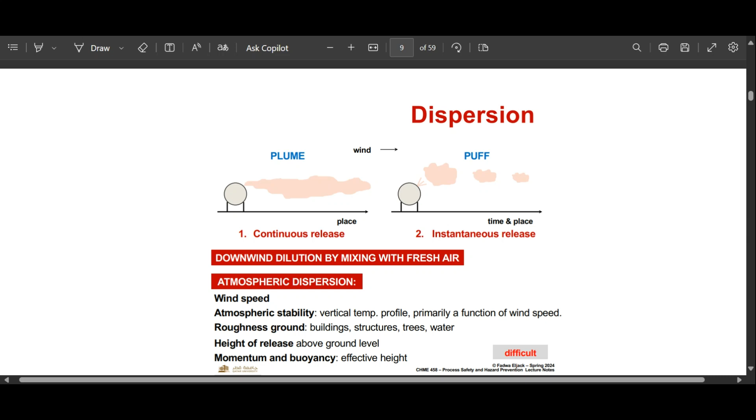Heavy gases generally want to go down. So those types of forces with momentum, all of this will impact how my material gets dispersed. It's not an easy task to model a system that considers all of these. Please note that the equations we have are basically an approximation, they will never be an actual assessment.

Nowadays, with technology, we have the beauty of having sensors and online monitoring systems, and you can use drones. So in case of a release, you can release a drone to automatically track and collect data related to the concentrations of a release.

But we don't wait for the accident to actually get the concentration, right? We want to predict what will happen on scenarios we're considering of what can go wrong, to prepare for it, to make sure we have the right emergency response team in place, the right evacuation drills. We know if that material is going to cause this much impact, then maybe more safeguards and protection might be needed.

Any questions so far, guys?

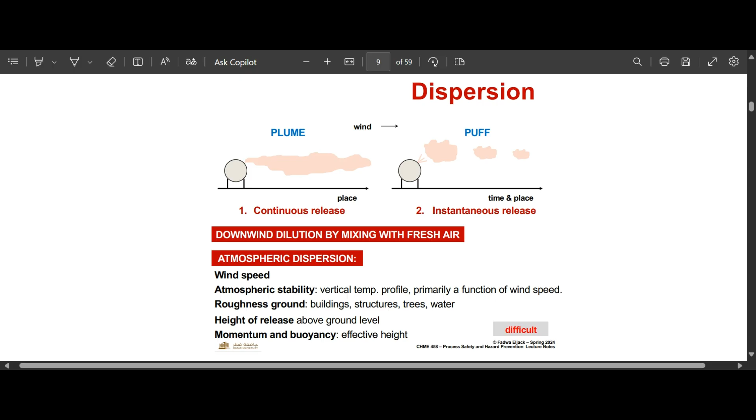Now, the wind speed, how does it impact? As the wind speed increases, the plume becomes longer and narrower during a continuous release. Also, as wind speed increases, the concentration, or the maximum concentration, of the toxic material gets diluted.

I want to again emphasize that the highest concentration you will experience will always be at the point of release, where the release is. But what we're interested in using dispersion modeling is the highest concentration downwind near the ground, where people might be. This is what the models help us predict. That concentration will always be less than the original one, but the highest concentration has to be estimated at some distance downwind from where the release occurs.

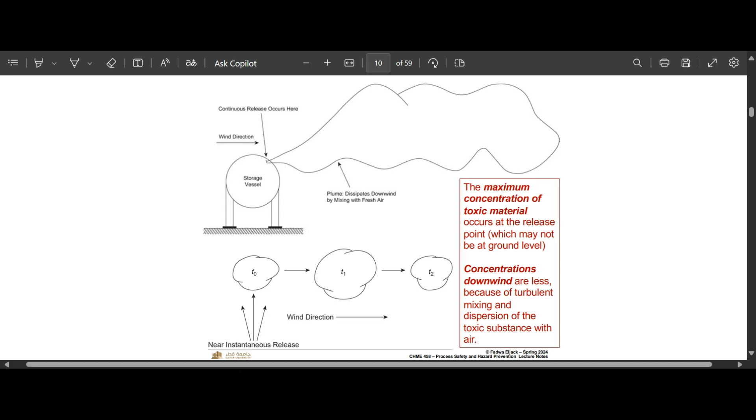Now we said atmospheric stability is also another parameter, right? Is this related to this?

Your phone? Can you put it down, please?

All right. Atmospheric stability has a big impact. We just said that the lighter gases want to go up, and the heavier gases want to stay on the ground. Now, what parameters impact the density of gases? Molecular weight. Okay, if I have the same gas, what other parameters impact its density? Temperature, right? And this is where the atmosphere comes into play.

Our temperatures during the day are completely different than our temperatures during the nighttime. During the daytime, we notice that the closer we get to the ground, the higher the temperatures are on the ground. The reason is that on a very clear day, especially in Qatar, the sun radiation hits the ground and causes a lot of insolation. This is where a lot of heat is absorbed on the ground as a result of radiation.

Because of that, the temperature difference between the ground and the atmosphere becomes much larger during the daytime. At nighttime, what happens? The temperatures near the ground are a lot cooler than the temperatures in the atmosphere. So the opposite happens. During the day, temperatures on the ground are much higher than if you go up. At nighttime, the temperatures near the ground are a bit cooler than the air at higher levels.

Because of this, if I have a release occurring during the daytime, where are the lighter gases going to be? How are they going to sit? The lighter gases will be near the ground because the higher temperature is at the ground, where the heavier gases are on top. Is that normal? No, it's the opposite. So what do gases want to do? The lighter gases are going to want to go up. This change in buoyancy force is going to cause mechanical turbulence in the atmosphere, making the atmosphere unstable.

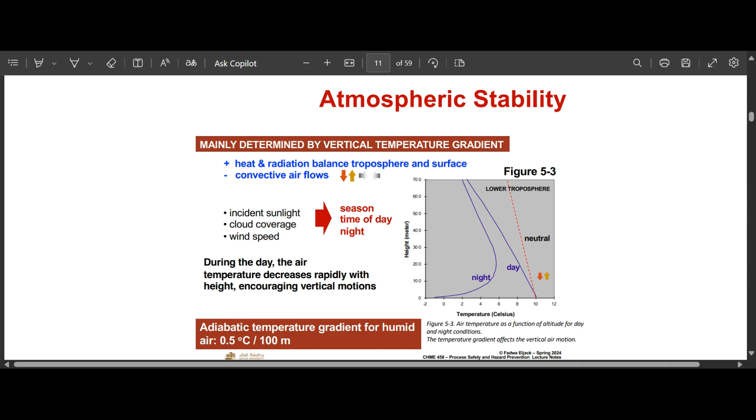In the unstable category, the air with lower density is near the ground and the air with heavier density is above the ground. This usually happens when there's high thermal radiation and insolation changes, causing a highly turbulent and unstable atmosphere. Here, buoyancy forces are helping to cause mechanical turbulence.

The second category, neutrally stable, is when the air above the ground is warm, but the wind speed is high enough to help cool off that air. This reduces the effect of thermal insolation, giving you neutrally stable conditions, meaning it's neither highly mixing nor highly stable.

The stable category is where heavy gases are on the ground, light gases on top, with limited impact of buoyancy forces, because temperatures on the ground are low enough to make that happen. During these conditions, we have a stable atmosphere, and the highest concentration of gases will be near the ground.

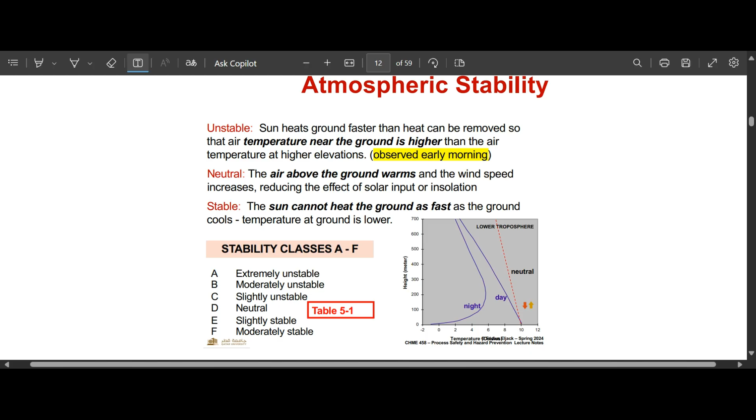When we divide them into 6 classes, the first 3, A, B, and C, are the unstable conditions. A is extremely unstable, B is moderately unstable, and C is slightly unstable. D is neutral stability, and E and F are the stable classes.

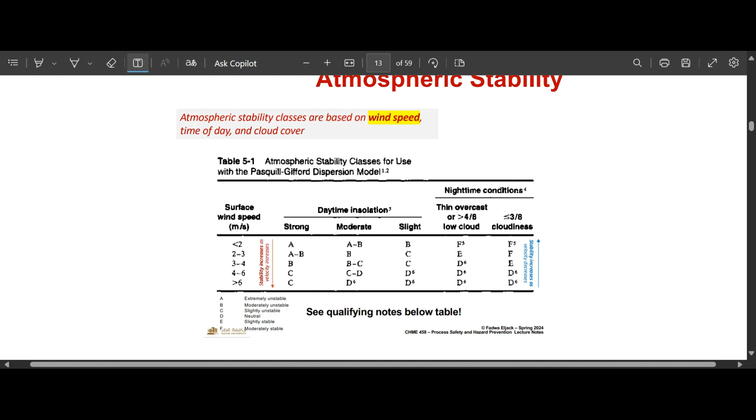We have guidelines to help determine what class of stability we have, because we need it to do our modeling. These are based on wind speed, time of day, and cloud coverage. By the way, these are not etched in stone—they're more fuzzy guidelines in terms of the stability class.

These 3 columns are all talking about daytime, and the last 2 are talking about nighttime stability. A is the highest unstable, and F is the highest stability. Notice what classes we have at nighttime? D and F, mostly stable.

Why? Because the ground temperature is lower, the heavier gases are on the bottom, and we don't have much turbulence. So it's mostly stable at nighttime. During the daytime, we have the more unstable classes, A through maybe up to D.

It depends on the wind speed, and it also depends on whether there's strong insolation—where you feel the radiative heat on the ground—or moderate, where you might have partial coverage, or slight insolation. This is when you have a storm and don't feel the impact of this radiation.

Now let's see how daytime is impacted by wind speed. If you have very low wind speed and no clouds in the atmosphere—a perfectly clear day—these are the perfect conditions to have the highest instability atmospheric conditions.

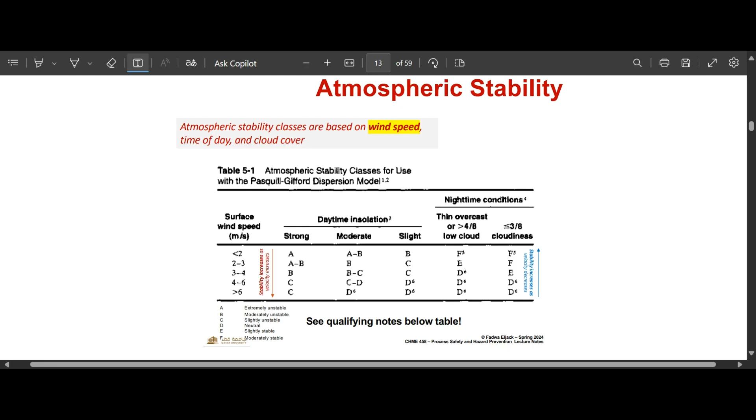If it's low wind speed, everybody's happy, things are cool, they're where they're supposed to be. But as soon as wind starts to come in, it's going to start moving the heavier gases a little bit to the top and the lighter gases to the bottom, starting to cause a little bit of motion. This motion is going to result in a little bit more instability, causing it to be more unstable, going from class F to a class D, which is neutrally stable.

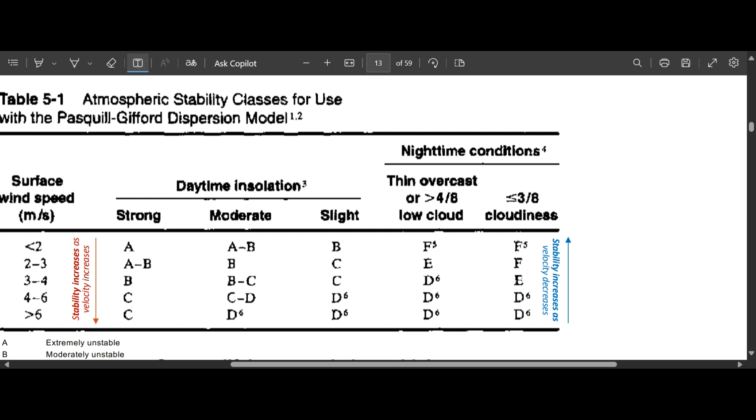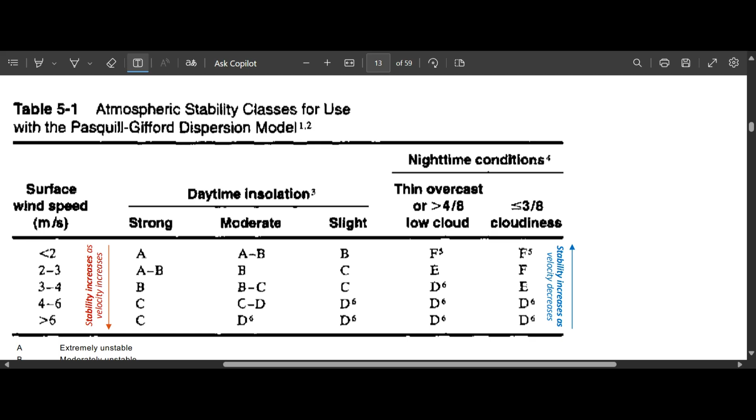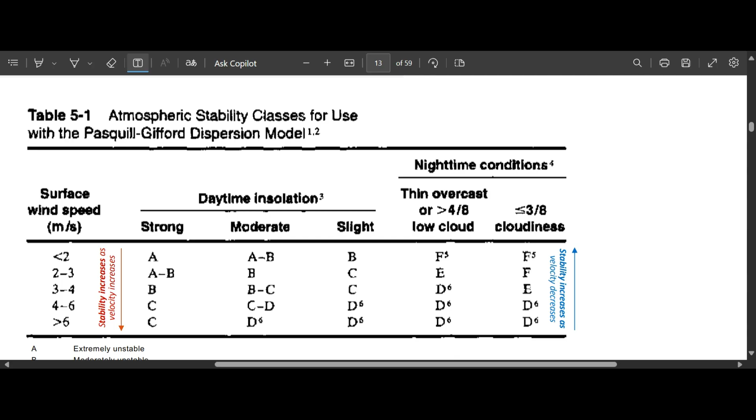Be able to understand these relationships because you have to describe the system that you're trying to model later on. Also, which of the scenarios are considered the ones we can manage to contain the leak? Let's rephrase it a little bit: what condition helps to reduce the impact of the accident on the people and the environment?

The ones that have the highest instability, category A, B, will be the ones to reduce the impact on the concentration downwind. And that depends on if it's daytime or nighttime. Usually higher speeds are better at nighttime, lower speeds are best during the daytime so that we can have a little bit of turbulence. At some point in time, the impact of wind takes over the impact of the mechanical buoyancy forces, depending on the wind speed.

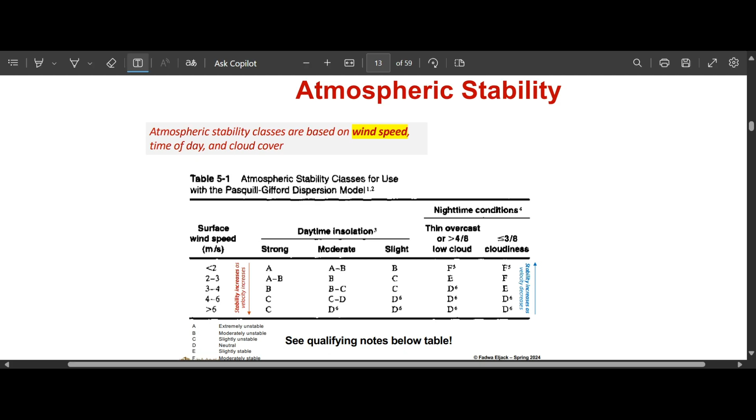So, atmospheric dispersion is a function of wind speed? Absolutely. Atmospheric stability, absolutely, and buoyancy, roughness, the height of the release, absolutely, and momentum and buoyancy. We saw that, right? We'll take a look at a bit more at the roughness and the height of release impact on how gases get carried away.

If I have an unstable atmospheric condition, does the effect of buoyancy enhance the mechanical turbulence? Yes or no? True? Why? Because the heavy and light clouds will be mixed. Yeah, but what causes it, during an unstable atmospheric condition? Increase of the temperature. Exactly.

The bigger temperature gradient between the atmosphere and the ground, because of that temperature difference, this is where you start feeling the buoyancy forces taking over, right?

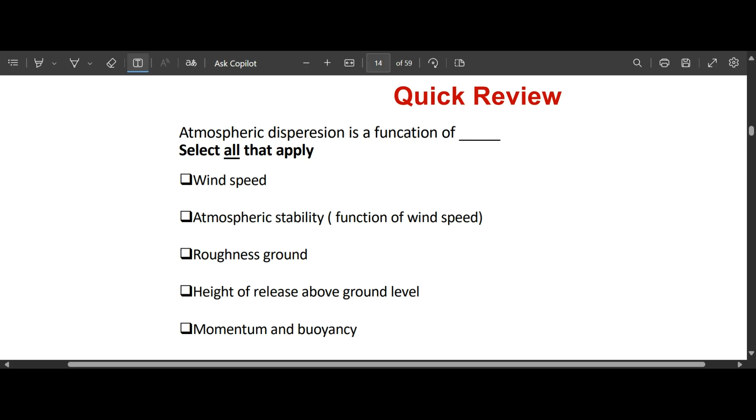So this is a fact, and the further downwind the plume gets carried, the longer it is, the larger the area that gets impacted by the release. But keep in mind that regardless of the wind speed, the total amount of material being released will be exactly the same. How it gets dispersed depends on the height of release and the wind speed.

What is the total amount of material being released? I can estimate it using source models, right? Our source models help us to determine either the amount or the rate of the material released.

Now, when we start to look at these models, the models depend on the type of gas and the buoyancy of that gas. Buoyancy depends on the molecular weight, and it depends on the density of the gas as it compares to the density of the air, because that determines where the gas is going to be released. So if I have a gas that's heavier than air, anything with a molecular weight more than 28 point something or 29, initially, once it gets released, what's going to happen? Initially, it will hit the ground, and then it will bounce, and it will start to mix with the air to the point where it becomes neutrally buoyant.

It's mixed with the air, it's suspended in there. If I have a gas that's light, right after the release, it's not going to hit the ground. It's going to be quickly buoyant into the atmosphere and will reach neutrality much, much more quickly. What type of gas I have and the density of that gas is going to impact the way in which it's going to get dispersed. This is the point here.

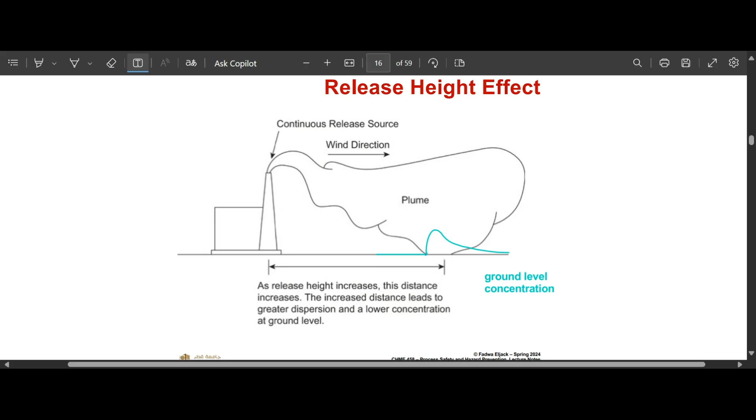Both can be modeled. Now, having those two types of models, we also need to clarify these models are not perfect, and real systems are not going to be easily modeled either as plume or as puff. They might be somewhere in between, but it's an approximation that we use. So how well you define your system and which model you select will help you be closer to what's happening in the real world.

Typically, the concentrations we're measuring for these gases is going to be in parts per million, right?

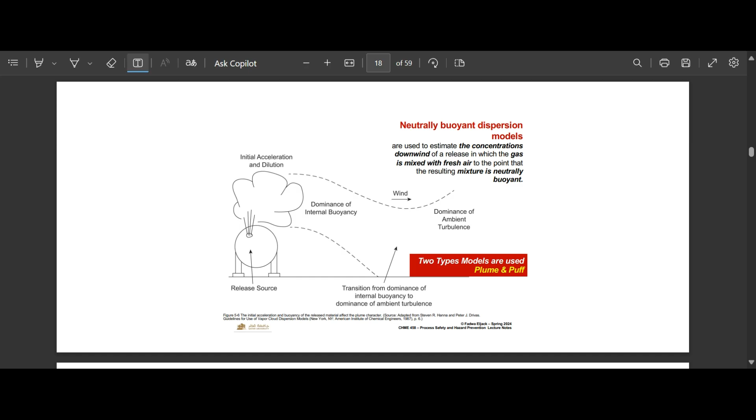Another factor that affects the way gases get dispersed has to do with the surface roughness. Surface roughness means that if your facility is near an urban city, the models are going to struggle in predicting because we don't have many models that can do that. But models also consider if you have vegetation - for example, Mesaieed is desert, so we can consider that similar kind of vegetation in our models, and our models are able to predict a little bit better in those types of environments.

Notice that sometimes vegetation might be a little bit hilly, so you have terrains moving up and down, maybe similar to Mesaieed, where we have sand dunes that might impact the direction and the way in which materials get released. So these models really have limited space to account for surface roughness, although it asks: is it going to be a rough surface? Is it near an urban release, or is it going to be a rural release, meaning somewhere out like in Mesaieed or Ras Laffan?

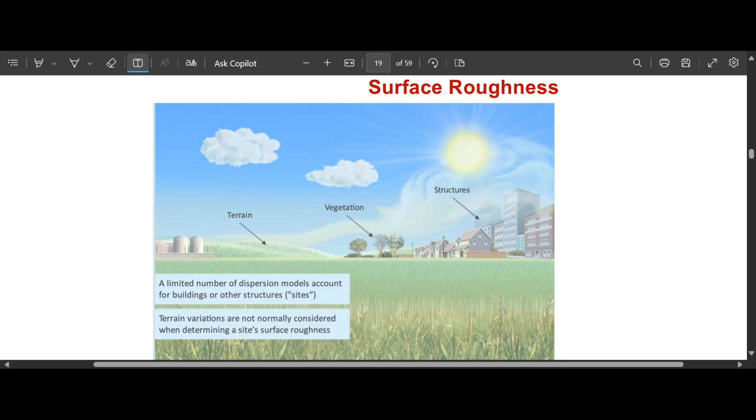So quickly, give me the 4 or 5 parameters that we said impact dispersion.

Buoyancy. Atmospheric stability. Wind speed. The height of release, very important. What else? Surface roughness.

Excuse my writing. It seems the older I'm getting, the worse my handwriting is becoming. I'm starting to scribble, and you don't have the interest to finish words for some reason in writing nowadays.

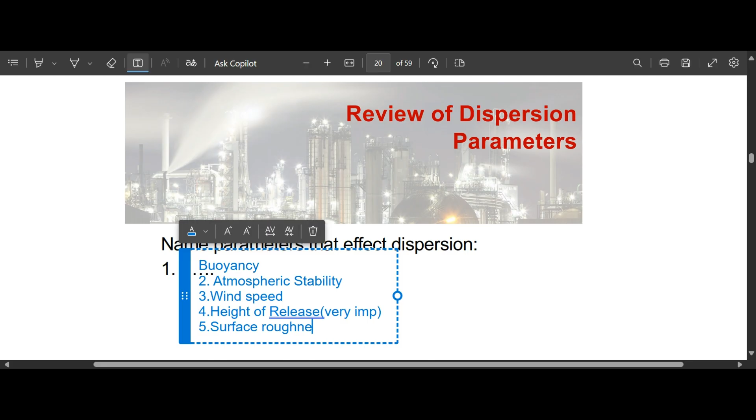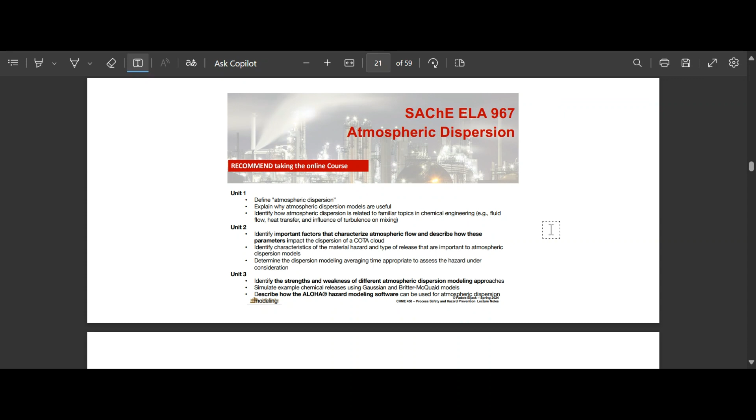Now, the models we're looking at, when you're trying to model dispersion, you have 2 approaches. One of them, you do full mathematical modeling of the system, where you're considering the eddy diffusivities, looking at the mass transfer coefficient, which is a function of many parameters, and you have a very nice theoretical model to help us predict the concentration.

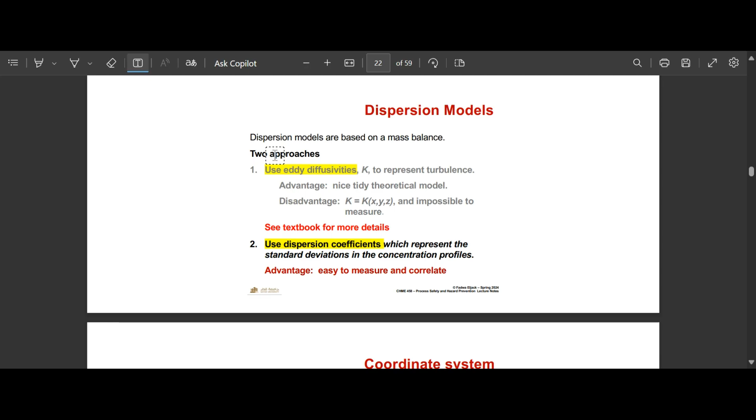Now, the issue with this is finding the mass transfer coefficient that represents the system is not really possible easily, and it's not easily measured experimentally. The other approach, which is what we use in the buoyancy models that we have, is we use dispersion coefficients, which can be experimentally measured.

This helps us determine the expected standard deviation of my concentration profile. So you'll find the dispersion models we're looking at are going to include dispersion coefficients that are a function of the space where we are in the X, Y, and Z space.

So because of that, let's take a look at our coordinate system. We have an XYZ coordinate system. The origin is always at the ground below where the release occurs. So even if the release occurs anywhere after the stack, in the middle of the tank, whatever, the origin is always at point 0 below. Z is my height, so Z would be 0, X is the direction of the wind, and Y coordinate is in the crosswind direction. This is how we look at our coordinate system. X is always in the direction of where the wind is blowing.

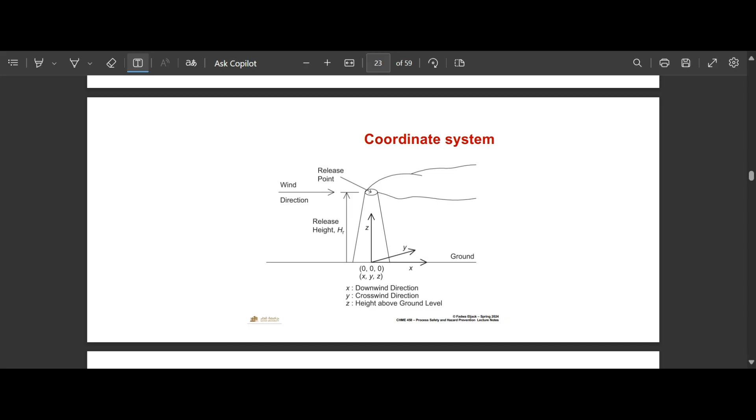But the full equation depends on the mass release rate. It depends on the dispersion coefficient, which takes into consideration the atmospheric stability and the wind speed. So you will see how when we estimate these coefficients, we have to know the distance downwind that we're interested in, the wind speed, as well as the stability class. The equation is a function of the velocity, and it's also a function of the height of release. So it's taking everything that we said that impacts my concentration, right?

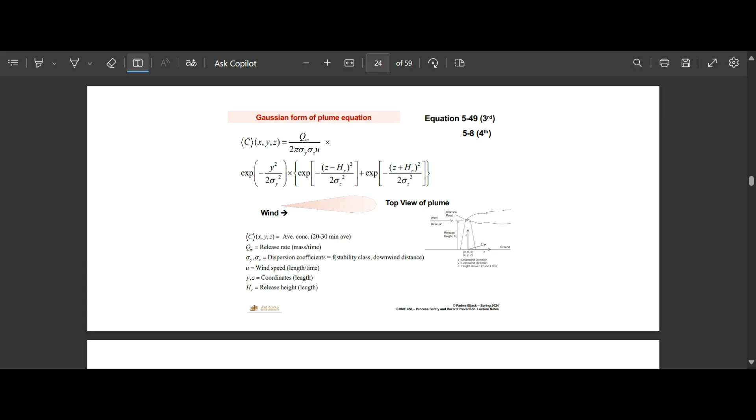For the dispersion coefficients, the sigma y and sigma z, we can extract them from these graphs, but we also have equations that can help us estimate these coefficients, and this is why we use them in these models.

Now, the coefficients are a function of where am I interested to estimate the concentration? Am I 500 meters away from the release site? Am I 2 kilometers away? And it depends on the atmospheric stability. And if I know those two pieces of information, then I can determine what is my sigma y and my sigma z.

Please note that you have two figures for sigma y and sigma z. These ones are for what type of roughness? Rural release, right? This is where you're out somewhere away from the city, this could be the desert, you have grass next to you, you have vegetation. This would be the parameters for this type of roughness.

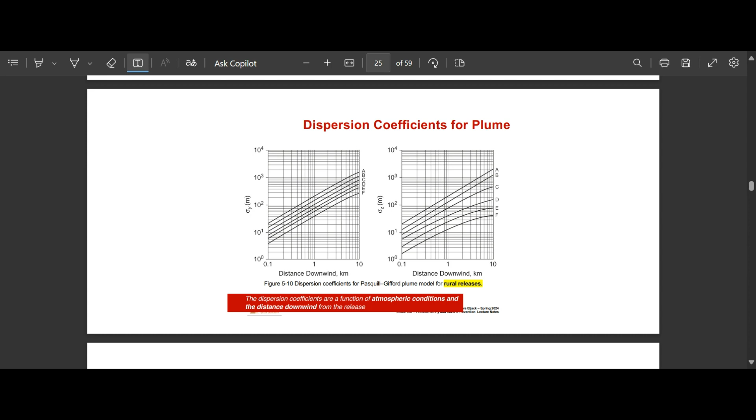We also have them if you have near cities. Again, to be able to get the coefficients, you need to know what location you're interested to estimate the concentration, and you need to know the stability. And within the stability, it's a function of velocity, isn't it? And solar insolation.

If you don't have the graphs, you can actually just plug in for x, put in the location that you're interested in, downwind, and you should be able to, based on the class, get the right equation to help you estimate sigma y and sigma z. And notice that both of them have units of distance.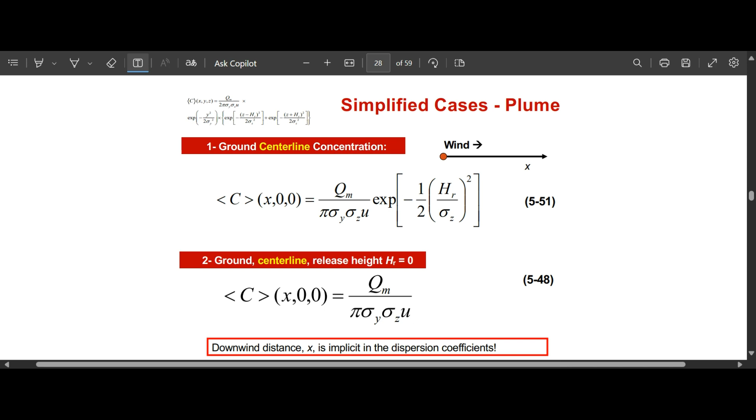We might be interested to know what is the maximum concentration downwind, right? In the plume. Because the plume, we know when it will hit the ground. But I'm not interested in the ground concentration. I want to know what is the maximum concentration within the plume. What did I say earlier about the maximum concentration? Release point, always at the release point. But after the release, the maximum concentration downwind will be somewhere within the plume after it hits the ground, right?

And to be able to estimate that, you don't know where x is going to be yet, because you want to know where is that highest concentration. So it requires a few steps.

In the first step, you take your height of release and you use this equation to estimate your coefficient in the z direction. Now, once you know your coefficient in the z direction, you can come to your graph here, or to your equation, and the equation is a function of the distance downwind. You don't know what that distance is. But for this sigma z, knowing the atmospheric condition, you can come down and determine where that is going to be.

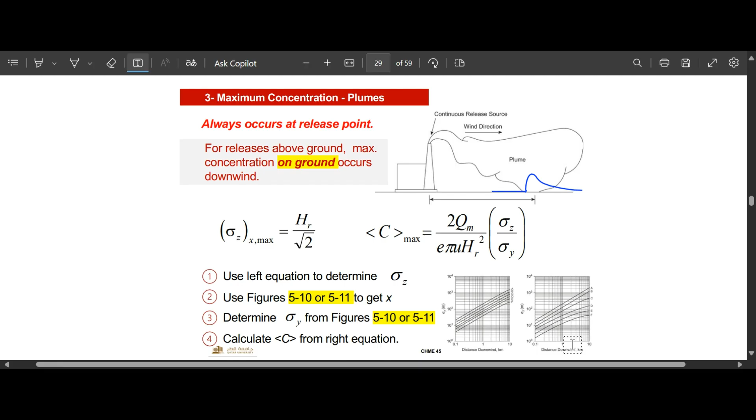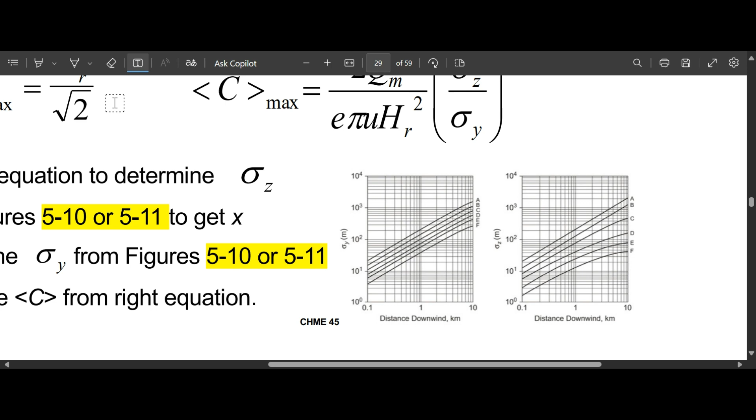So the highest concentration downwind, the location of it, it's going to depend on the height of release. We use it to estimate what is that x. Once you know x, then you can estimate the other coefficients, sigma y and sigma z. And once you know that, then you can plug it into this equation here, and you can estimate what is the maximum concentration within the plume downwind from the release.

Professor, we should determine sigma x.

Do we have sigma x? Sigma x is equal to sigma y. So you get sigma z from this equation, you plug in here to find your x, the distance downwind where the highest concentration in the plume will be felt. You can then use it to get your sigma y and your sigma x, and you plug it into your equation here to be able to estimate what is the maximum concentration.

Doctor, this is only for the maximum, right? This is for the maximum. Now, if you know the maximum, can you know the time it will take to reach the maximum? You know the velocity of the wind? You know the distance, right? Then the distance divided by the velocity is going to give you the time.

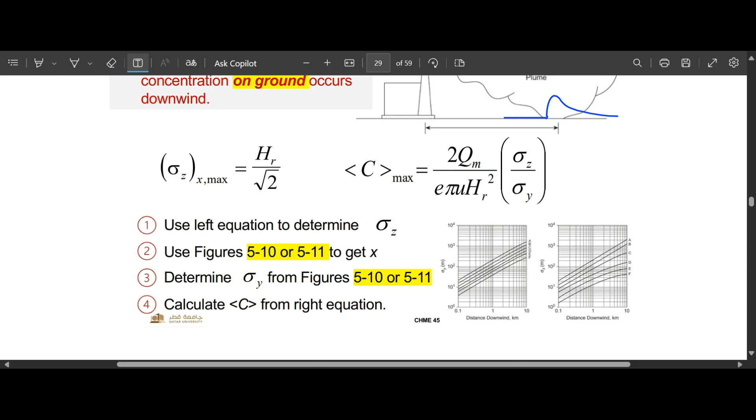All right. Now, those were models for plume release, continuous plume area. If we have an instantaneous release or a puff, first notice something. When you have a puff release, initially at time t equal to 0, this is the maximum concentration and the size of the plume. What happens as this puff gets carried away, it starts to get a little bit bigger because air starts to mix in with the gases that you have. So it makes the diameter of that puff a little bit bigger. But at some point in time, it gets a maximum size and then it starts to get smaller and smaller, because the more mixing it has with the wind, the smaller the concentration within that puff is going to be. So the profile is usually small, it gets really big, and then it starts to go smaller.

And if we take a look at the equation, the neutrally buoyant equation for puff release, it's a function not just of the coordinate system, but it's also a function of time. In continuous release, because the velocity is constant, right? Yes, no problem. But here it depends on what time you want to determine this concentration. So you have to include that as your input.

Now, this equation or this model is a function again of the mass release rate. And this is not the release rate, it's the mass release amount. This is why it's Qm star. It's the total amount of material released at time t equal to 0.

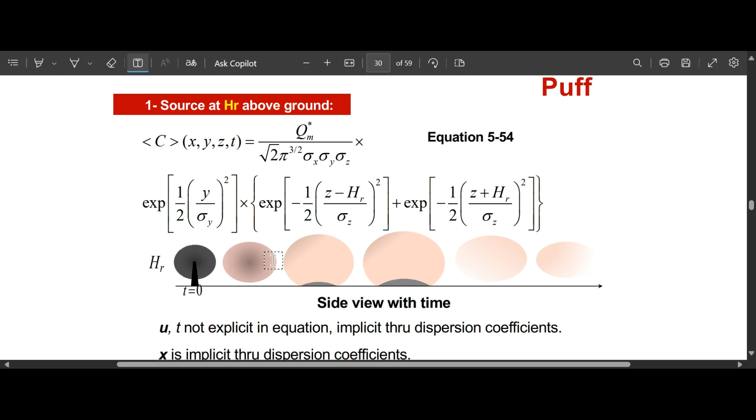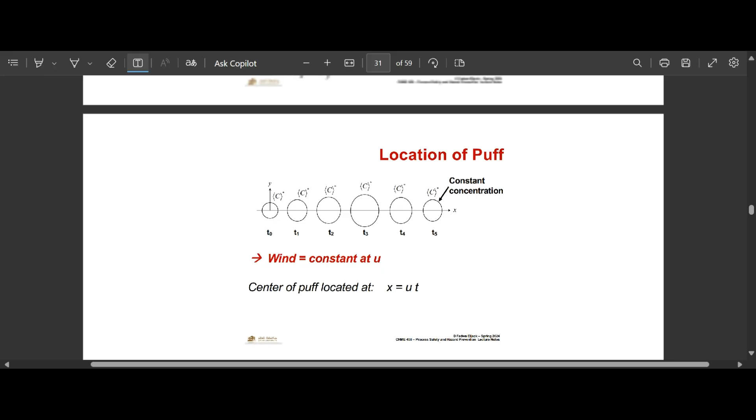And we said we assume that sigma x is equal to sigma y. If the wind speed is constant, then if I want to determine the time it will take to reach a concentration, I need to know what location am I interested in. I can determine how long it will take to get to that location, or if I know the time, I can determine what will be the concentration at a specific location. Okay, both ways it could work.

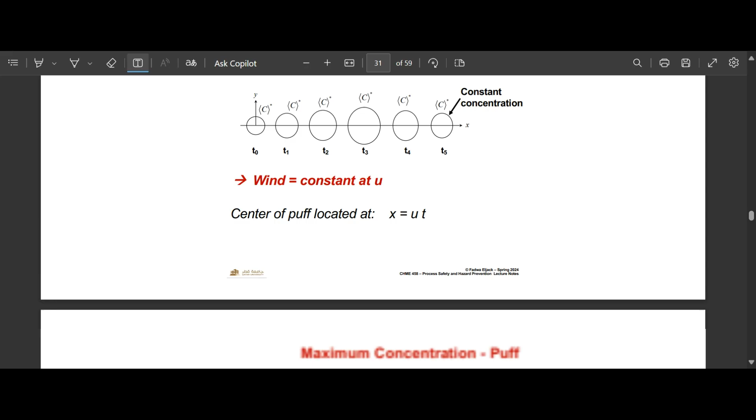And as I mentioned, the puff size starts to increase, and then it starts to decrease. When we're measuring the concentration for a puff release, we're always measuring the concentration on the ground below the center of the puff. Okay, so this is one of the assumptions. When we are looking at the concentration on the ground, the maximum concentration will always be right below the center of the puff. Right? It will not be here or here. It will be right directly at where z is equal to 0, below the center of the puff.

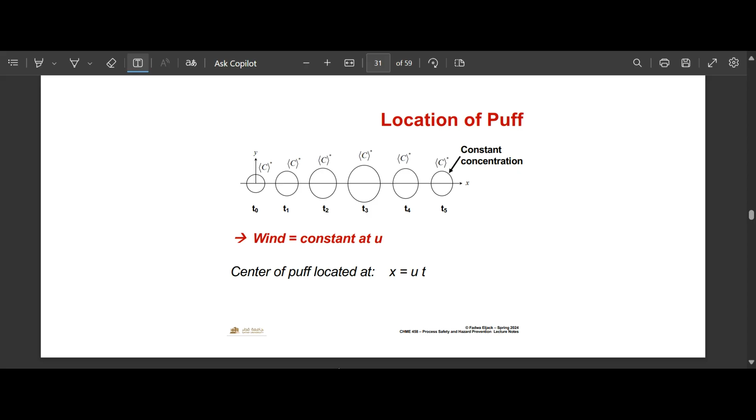Again, for the coefficients during puff release, we have equations. And you notice the equations are a function of x again. You can use them to estimate sigma y and sigma x, as well as sigma z in units of distance. Or you can use the graphs. The graphs, again, you have graphs for rural release and graphs for urban releases. I only showed the one, I think, for rural release. And these are my equations.

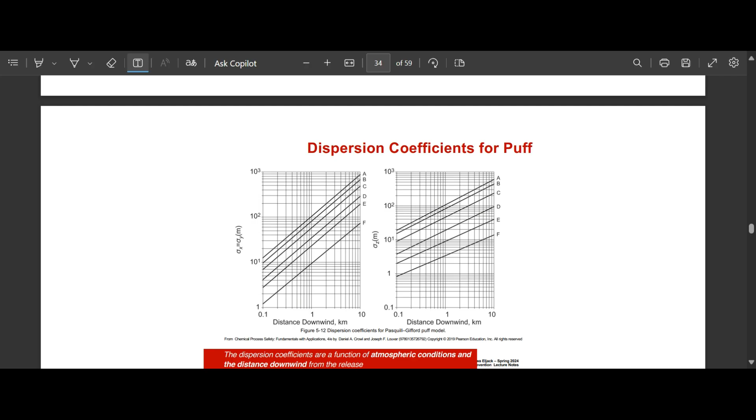Now, which models should you use? There are simple guidelines. If the situation describes a release rate in terms of mass per time, then you use a plume model. If you're given the total amount of ammonia released from an incident with no information about time, then you model it as a puff release. If the mass released over a period of time equal to or less than 10 minutes, you again model it as a puff. You take the total amount of material released within that short period and model it as a puff model.

One of the other assumptions we have is that most of the time facilities are located in rural areas, so you should use the coefficients for rural modeling for vegetation.

All right, any questions so far? Do you understand the concepts of how these models are developed, the types of releases we have, and the kind of information we can get?

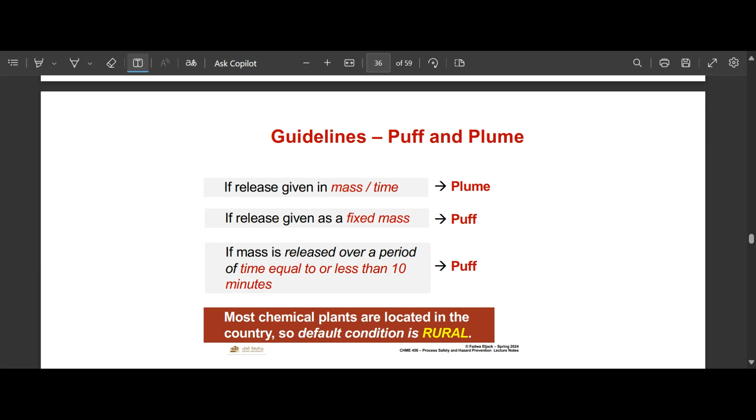What does the EPA require when looking at companies reporting their risk management plan? Worst case scenario. So in the worst case scenario, they have to come up with a scenario that looks at maximum amount of material release or maximum release rate, and then model the impact it will have on the environment and on people. All right, let's take a look at this example here.

We have 10 kilograms per second of H2S released 100 meters off the ground. So that's my height, right? Release height is equal to 100 meters. My QM is 10 kilograms per second of H2S. And we're asked to determine the concentration 1 kilometer downwind on the ground.

So what is 1 kilometer equal to? 1,000 meters. But it's represented by X.

All right, we have to describe the atmosphere scenario. It's a clear sunny day, 1 p.m. 1 p.m. means it's right in the middle of the afternoon, so the highest degree of thermal insolation will be felt. And the wind speed is 3.5 meters per second.

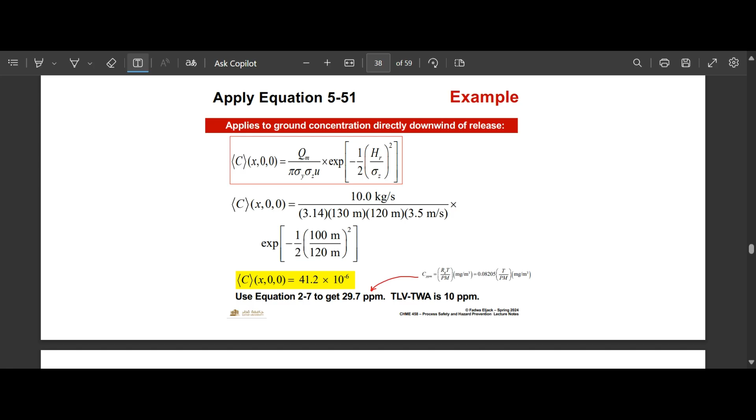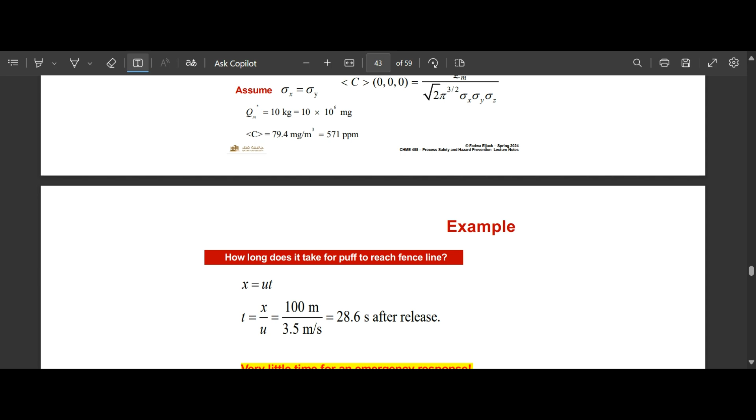So if this material is released, and I go 1 kilometer downwind from the release site near the border of the facility, I will know that the concentration is going to be 29.7. So that means within that 1 kilometer, the concentration is higher, most likely. And if I compare this with the TLV value for H2S, which is 10, I'm going to be overexposing, right?

TLV is formulated by the industrial hygienist. It's not OSHA yet, right? If I want to know if I exceeded any regulatory limits, I will need to look at the permissible exposure limit, the PEL, and compare. So obviously, I will have overexposure if somebody is near that 1 kilometer point.

What are the units here, by the way? Kilogram per meter cube, the seconds cancel, right? Then I can convert it to parts per million using that equation.

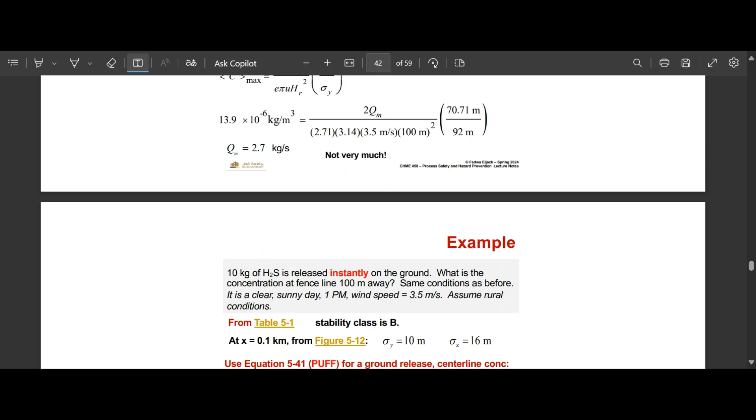Doctor, yes, this thing gets me confused every time. Should parts per million be milligram per liter, not meter cube? The reason we say meter cube is for gas. In gases, we're looking at meter cube volume. If it was liquid, then we would be looking at liters, right? And in liquids, the conversion between milligrams per liter to parts per million is going to be 1-to-1. It's easy, we don't have to worry about temperature and pressure effects because it's not impacting.

But for gas, it has a huge impact. And the reason we look at cubic meters is because usually the concentration is considered in a 1 cubic meter volume space.

Now, if we ask the question, where is the maximum concentration downwind? I want to know the location. Then I would follow this equation. Remember, we said it's a few steps. I need to determine where the location is first. So I first use this equation, plug in my height of release, and find that sigma z is 70.7.

If I go to table 5.2, I'll get that this is the equation for class B atmospheric condition for sigma z. I know what sigma z is. I plug it in here, and I solve for x, right? And I'll get that the location where the maximum concentration will be felt will be 590 meters away.